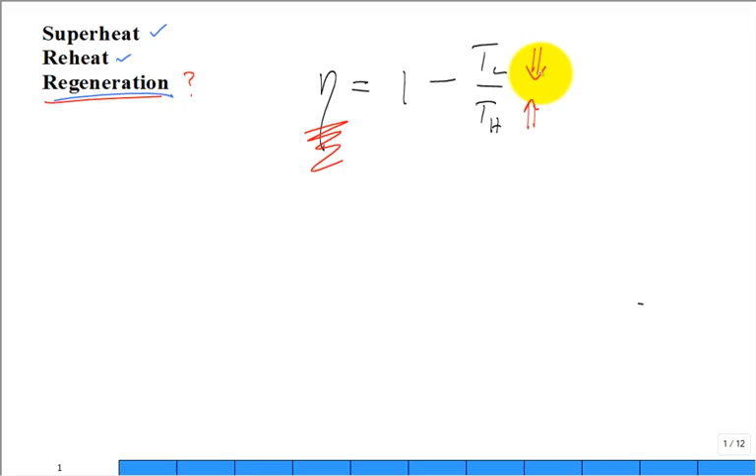So when you look at superheat and reheat, they're trying to focus on getting a lot of heat in at very high temperature. You can look also at trying to reduce TL, but you're kind of stuck there. You have to dump it to lake water, and the lake water is not going to be dramatically different.

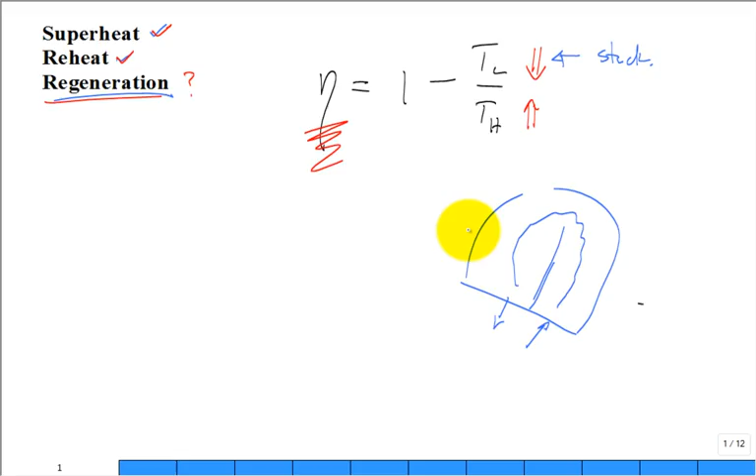Usually they build big lakes. Anybody around here been on a lake where they fish and the lake actually was man-made? I think there's one lake in the state of Texas that's not man-made - the rest are all man-made. A lot of them are made for flood control, but a lot are made for power plants. So what happens is they put in warm water one place, they usually have a little separation zone and make the lake large, and then the water has to go around before they take it back out of the lake. Maybe there's a pump station to keep the lake at constant level. At Bay City, there's a nuclear power plant - they pump it out of the Colorado, or they have runoff from the rivers. But often they make sure the lake water stays pretty constant for the power plants there.

Anyway, you're stuck here, but you can still attack right here. So superheat and reheat are made where you bring the heat transfer into the working fluid at high temperatures. What about this regeneration? It's the same approach right there.

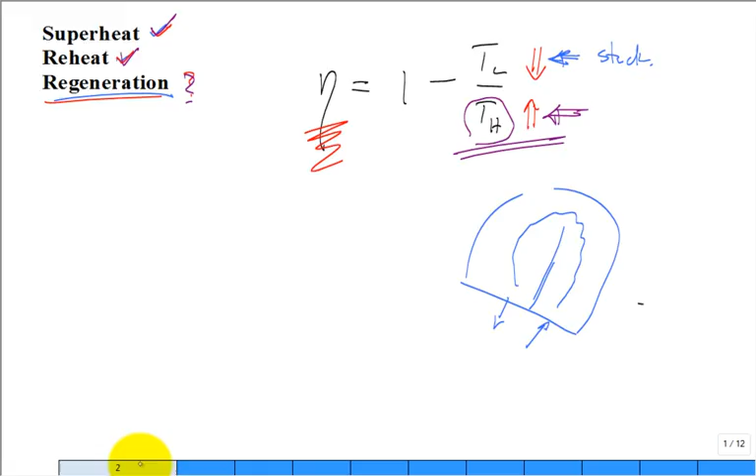What did we know was wasteful in the current system? Let me do this. So from memory, can we sketch a power plant that has reheat? We're going to have the steam generator or boiler, the first turbine stage, the second turbine stage, the condenser, and a pump. And the fluid goes like that.

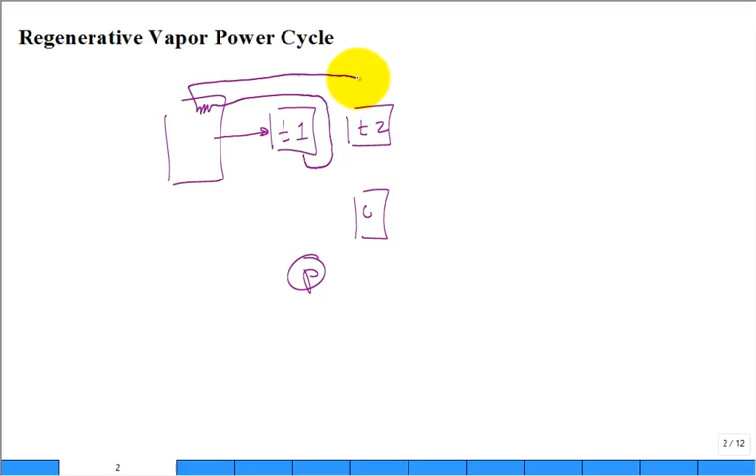So how does it go? It goes out of the boiler to the first turbine, we're going to reroute back to the boiler for reheat, then into the second turbine, out of the second turbine to the condenser, out of the condenser to the pump, and then the pump back.

And why do I try and make a big deal about this - it's a particular Q on the first pass, and this is a particular Q on the reheat pass. Because students will forget the reheat pass, right? Okay, now we have a good idea of the numbering of states. Let's put 1, let's put 2, let's put state 3, state 4, state 5, and state 6.

And we could put this on a temperature entropy diagram. If I put a line of high pressure, then I put a line of intermediate pressure, then I put a line of low pressure.

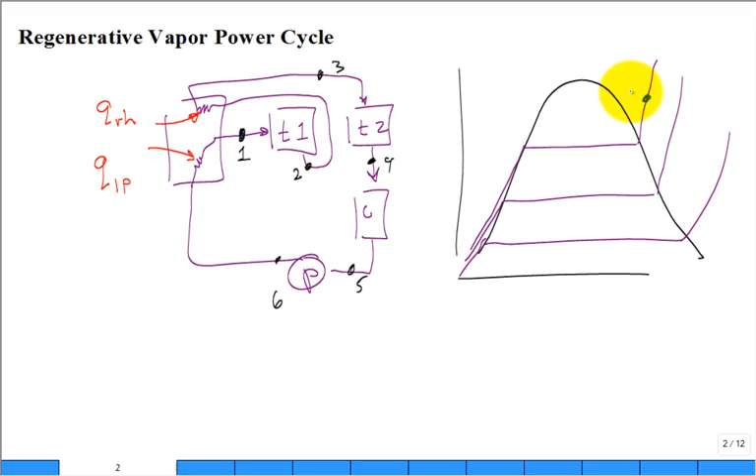Looks like that. Where is state 1 if you have it superheated? Then you go isentropic - this is a TS diagram. Then isentropic expansion down to 2, typically high quality. Reheat, maybe up to state 3, the same temperature - it could be lower temperature at state 3 than 1. Expansion down to 4. Over here, condense at state 5. And where is state 6? Just a little above, and that's state 6 right there. Often it's very difficult to see the difference between 5 and 6 on a TS diagram.

Where is the waste? We just talked about how it's great to bring this heat into the working fluid at high temperature. Isn't all of this heat coming in at relatively high temperature? But where's the waste?

There's more heat being brought in here. But when you're coming out with state 6, we threw some numbers around. Let's say it was a temperature of 60 degrees C at state 5. What's the temperature at state 6? Around 60.5 - it's very close to 60 degrees C at state 6.

And so we threw out some numbers. If you boost it all the way up, it's going to start boiling at around 300 degrees C. I was using 8 megapascal for that boiler pressure, so it's around 295 degrees C. And yet this temperature down here is 60 degrees C. There is a lot of heat addition at low temperature. Is it good to bring in heat into your working fluid at low temperature?

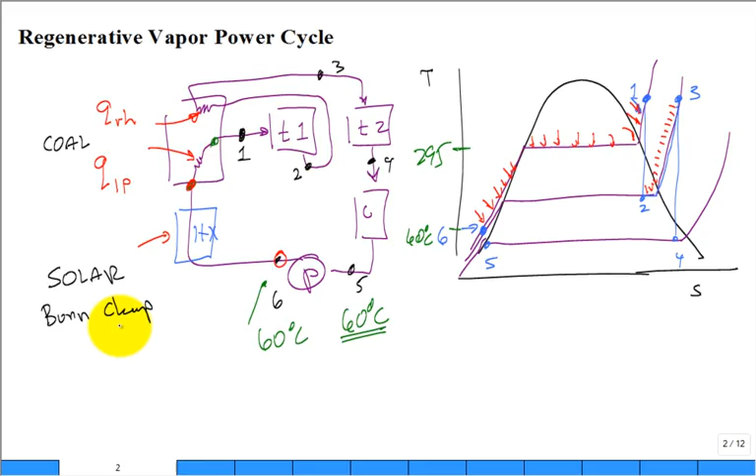So how do you make it work? How do you get it to be a little warmer? What they call this is the feed water. They want the water that's feeding the steam generator or boiler to be warmer, not come in cold at 60 degrees C. So, what do we want to do?

You want to take out of one pocket and put into the other pocket. Basically, when you split that at state 2, it's still pretty hot, and you can do something with it. So what you can do is break it down here and bring it down to what they call an open feed water heater. And that's the strategy in a regenerative vapor power cycle.

All right, so coming out at state 6, you mix with the fluid that's diverted from state 2, and you come out at a new state 7. But if you're going to mix it, it's just an open heat exchanger - you're just mixing two streams.

Can you tell me a little bit about the pressure at 6 compared to the pressure at 2? Would it be greater, less than, or equal? It would be equal. And then, how about the pressure at 7? It's the same - they're all 3 the same pressure. But we know that the pressure at 2 is less than the pressure at 1. So what do I need to put between 7 and the introduction to the boiler?

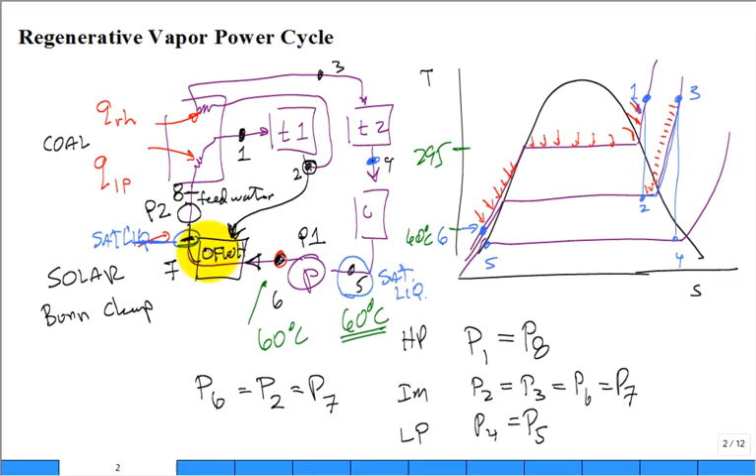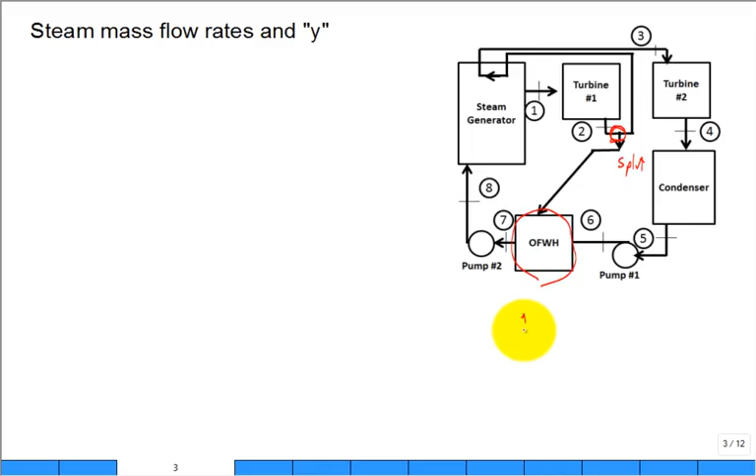Well, we need to talk about our mass flow rates. What's special right here, it's nothing too complicated. You're splitting the flow, aren't you? So it's split right there. What's happening right here is you're joining the flow back together, true? So if we can trace out one stream which continues on the loop, it goes over to this reheat. Then after reheat, it goes through this turbine, through the condenser, through this pump, and then into the open feed water heater along that path.

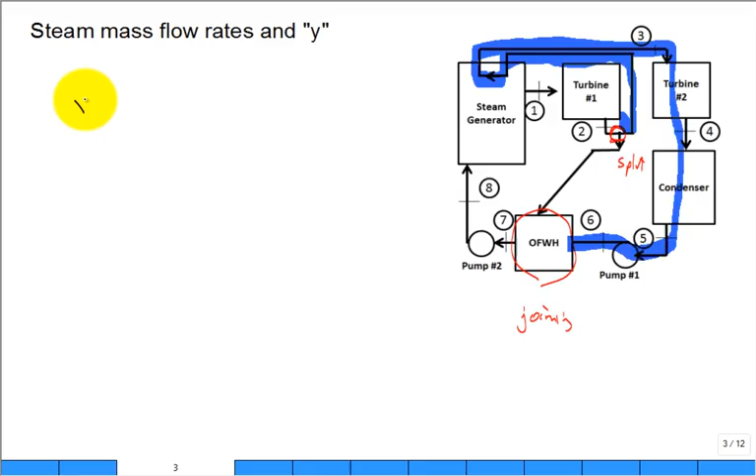So we'll talk about maybe the mass flow rate that goes to the reheat, or the mass flow rate that goes through the second turbine, or the mass flow rate that goes through the condenser, or the mass flow rate that goes through pump number 1. But if I have 11 kilograms per second flowing through reheat, then I have the same magnitude kilograms per second going through the second turbine, condenser, and first pump.

The other is what is split off this and gets diverted down here. Now this is not rocket science, I'm just going slowly over a mass balance. We have to get the mass balance correct. And then the other is after it's joined together, right here, it goes through the second pump and then through the first pass of the steam generator and then through the first turbine.

Does that make sense? So we really have 3 distinct mass flow rates. So the other mass flow rate is, let me just write it down, the mass flow rate through the second pump, mass flow rate through the first pass of the steam generator, and the mass flow rate through the first turbine. And then the last one, there's really not a good subscript. I'm making a lot of these subscripts up. I don't think the book uses this many subscripts, but I'm trying to be clear about it, is the mass flow rate of steam that's diverted to feed the open feed water heater. And so this is the amount that's to feed the open feed water heater.

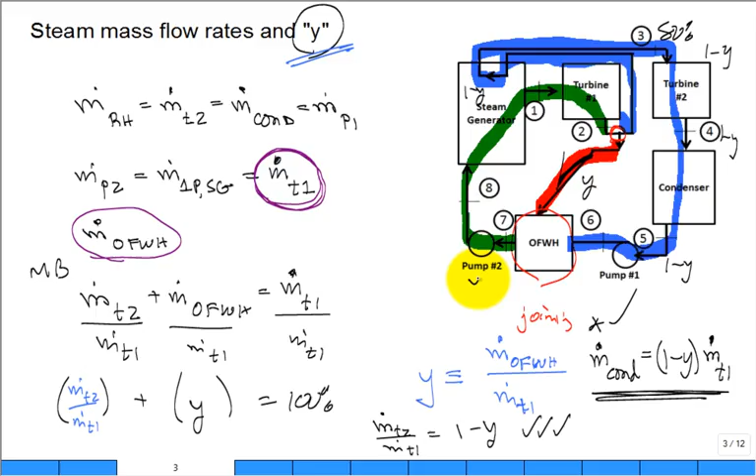Let's press forward then. But all of this page is all on mass balance and introducing that term Y. And a lot of times you'll see me say, for what the split is, that's Y. And then this over here is 1 minus Y, 1 minus Y, 1 minus Y, 1 minus Y—that's the fraction that goes through the pump, the condenser, the second turbine, the reheat. And then it's joined back up to 100% that goes through the second pump, 100% that goes through the first pass of the steam generator, and 100% that goes through the first turbine stage.

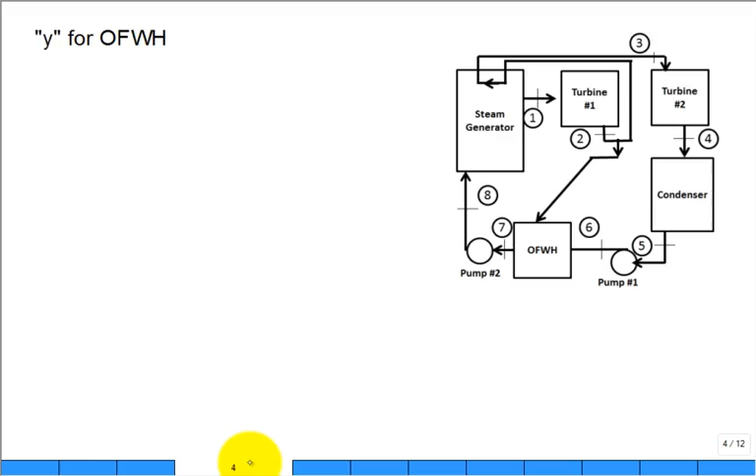How can I determine how large Y needs to be for this open feed water heater? Somebody says, well, Y is 19.3%. Okay, well, where did that number come from?

So I'm going to pause for a second, and I would like you to work on this problem to develop the equation for Y and be able to explain it to me as I walk around—like, this is what I'm doing in order to calculate what Y needs to be for this problem. And Y will depend on the pressure of the steam generator or boiler, the condenser pressure, the intermediate pressure, the amount of superheat coming out of the steam generator, and the temperature coming after the reheat.

Well, let's see, a couple jokes. You want a joke? How many people took Texas history? It's a college level requirement to graduate, blah blah blah. Yeah, I did too. One of the things I learned was that there was a governor named something Hogg in the history books of Texas. Do you remember Governor Hogg? I forget what years he was, 1910 or 20 or something. And he had two daughters. And he named one of them—does anybody know this?—Ima, so that she would say, who are you? I'm a Hogg. And then the other one is You're a Hogg. True. Anyway, I named my two daughters...

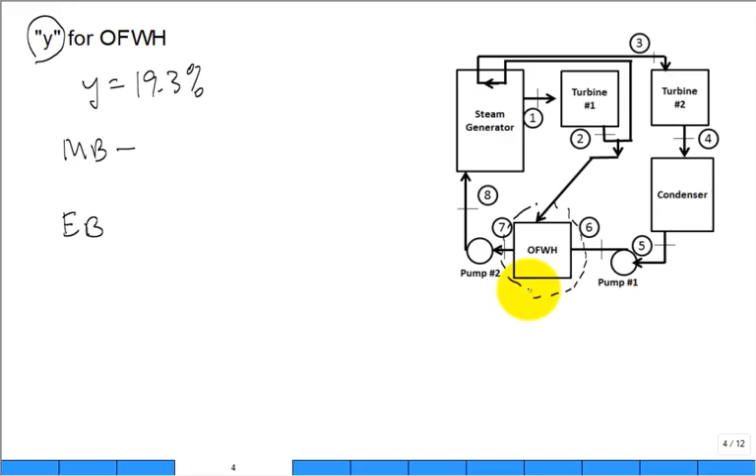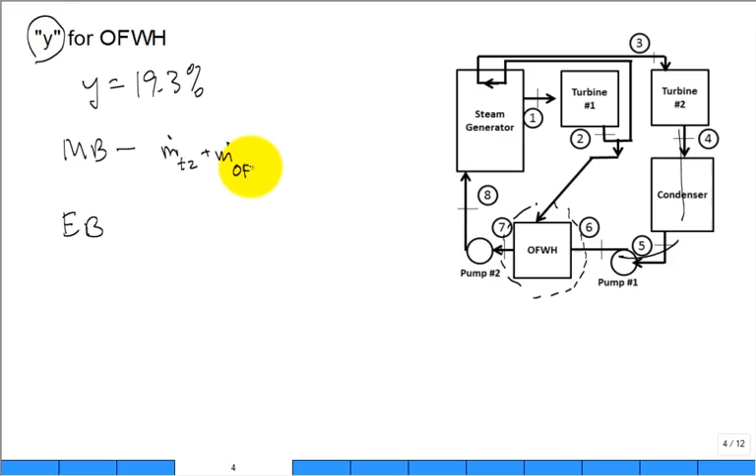So what we do is we introduce a control volume. I think the action's right here on that open feed water heater. And if I have a mass balance for that open feed water heater, I need some syntax for the subscripts. I would say m dot through the second turbine, because that's what goes through the condenser through the first pump, plus the mass flow rate that's diverted to feed the open feed water heater, is equal to the mass flow rate that goes through the first turbine. Well, it also goes through the second pump and through the first pass of the steam generator, right?

Now let's leave that alone for a second. Let's now combine it with an energy balance for the same control volume around the open feed water heater. What is the energy balance? I'm going to pause, walk around.

So let me help here a little bit. What do we have for an energy balance? I know that you can start with a control volume and the rate of change, neglect kinetic and potential energy, and there's no shaft work and no rate of heat transfer outside the control volume to the environment.

It boils down to the mass flow rate coming in, that stream coming from pump 1, which brings with it its enthalpy at state 6. Did I do that right? M dot T2 is the same as M dot condenser, M dot pump 1, right? Plus the mass flow rate coming to feed the open feed water heater, bringing with it its enthalpy at state 2. It's a little confusing.

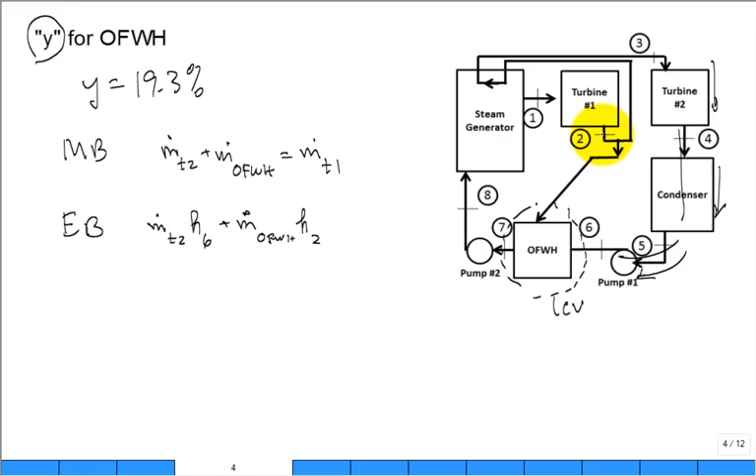Somebody said, what's the enthalpy of the steam going over to the reheat that enters right there? What's that enthalpy? It's also 2. It's also 2. But that has to equal the mass flow rate that comes out, goes through pump 2, goes through the first pass of the steam generator, and into the first turbine stage, with its enthalpy H7.

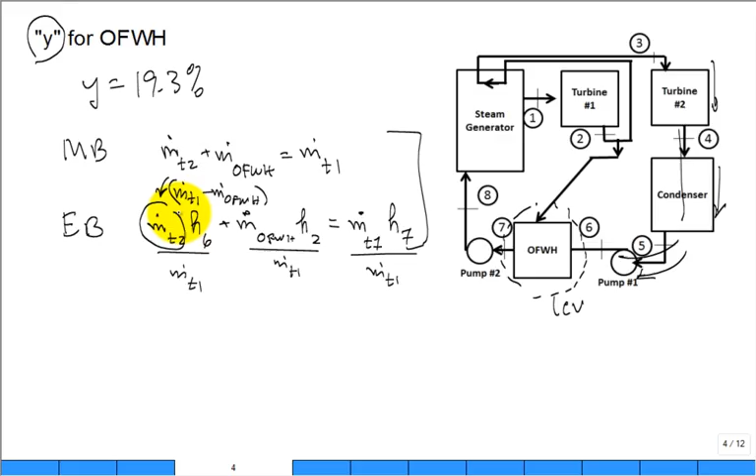Now we have 2 equations, and you can do some manipulation. How do you want to do the simplification? You can divide the whole equation by M dot T1, M dot T1, M dot T1, and substitute this right here from that equation. You could substitute that's M dot T1 minus M dot open feed water heater. I know I'm doing a couple steps at one time, but I would get an equation. You have more space than paper.

You would go a little slower, and you would get 1 minus y times H6 plus y times H2 equal to 1 times H7. And then we do a little more algebra: Y is equal to H7 minus H6 divided by H2 minus H6.

I checked a few people. Did you have every subscript correct on this definition of Y? Yes, yes, yes, 3. How many others? 4. You had it perfect? Because you can easily have a subscript off, right? There it is. Where did that equation come from?

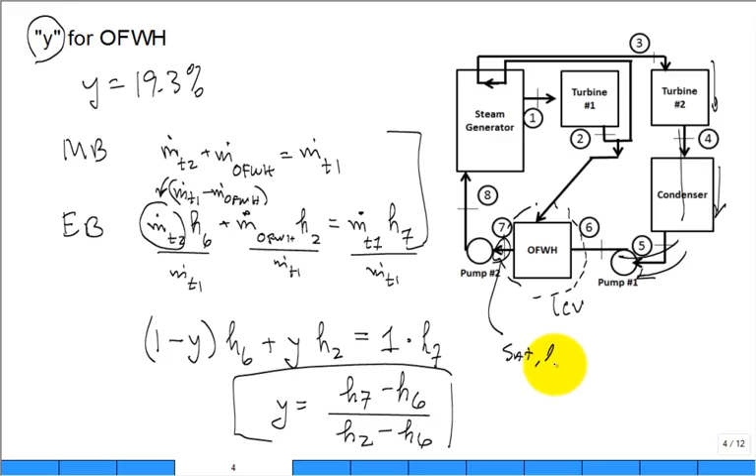Mass balance and energy balance around the open feed water heater. And notice, remember, state 7 is going to be dictated—it needs to come out as saturated liquid. All right.

Words can be very confusing, and this is possibly one of them. So let's just read it. The question may read something like, determine the heat transfer from the working fluid, right there. What do they mean by the working fluid? It's the fluid that's going through the different components—this component, that component—passing through the condenser. So now it's only the working fluid going through the condenser.

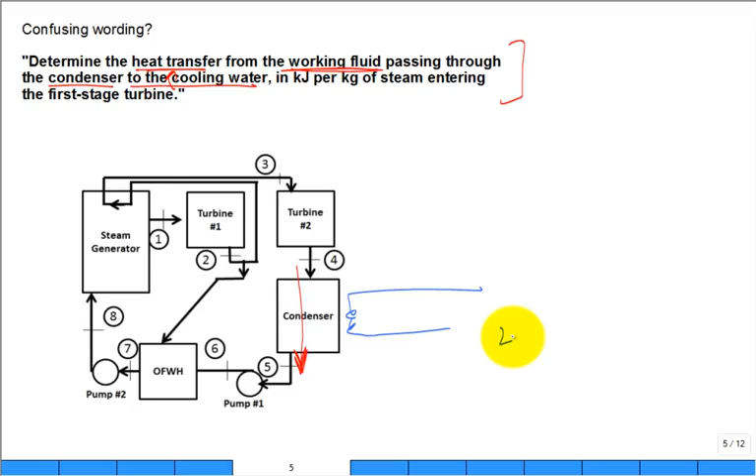To the cooling water. Well, what's to the cooling water? The heat transfer—this is actually modifying the heat transfer. So it says, determine the heat transfer from the working fluid going through the condenser that is being transferred to the cooling water, which is some sort of lake water. You can think of lake water, it can be river water, a bunch of different things. But it has a temperature in and a temperature exit. And isn't there a transfer of heat between the two?

And this is a great Q dot right there. So thinking Q dot is out of the working fluid going through the condenser and into the cooling water like that. But they want it in these units—they want it per kilogram of steam entering the first turbine stage. This is the confusing part. The rest of it was pretty good so far, but it's per kilogram of steam entering the first turbine stage.

If you do a control volume around the condenser, you do have a Q dot out of it because the control volume doesn't cut way over here—it's not cutting the inlet and outlet of the cooling water, it's cutting between the heat transfer of the two fluid streams. You'll find that this Q dot is equal to the mass flow rate through the condenser times the enthalpy 4 minus enthalpy 5. Do you agree?

So if you take this equation and modify it, you have q dot divided by m dot through the condenser—that's like lowercase q in the condenser, and that's h4 minus h5. But this will be kilojoules of heat transferred from the working fluid per kilogram of fluid that's going through the condenser. But they want it not per kilogram of fluid going through the condenser—they want it per kilogram of fluid going through the first turbine.

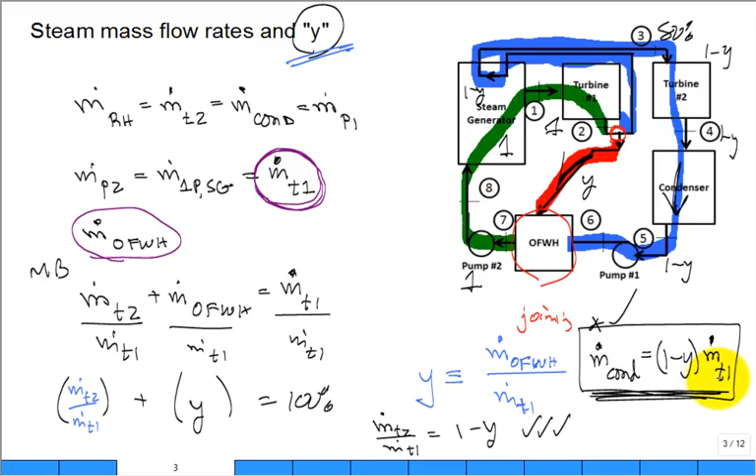So either we think back, what was the relationship between the mass flow rate of fluid flowing through the condenser and the mass flow rate of the fluid going through the first turbine? So what we do is bring it over here and write Q as 1 minus Y times the mass flow rate through the first turbine times H4 minus H5. Do you see that substitution?

Did that make sense? Now they want you to calculate Q dot divided by M dot T1. That's Q dot in the condenser equal to lowercase q in the condenser, which is 1 minus Y times H4 minus H5. That's what they really want, because now it's per kilogram of the working fluid that enters or goes through the first turbine stage.

Why does it appear so confusing? Because then everything can get on the same per-kilogram basis when you do an energy balance, knowing the works and heat transfer for each component. When I put in a little work, all I do is boost the pressure of the fluid going through the condenser and through that first pump. The work from the second turbine is per kilogram of fluid going through the second turbine, but I may want to combine it to calculate the net work of the cycle, putting it on the basis of what goes through the first turbine.

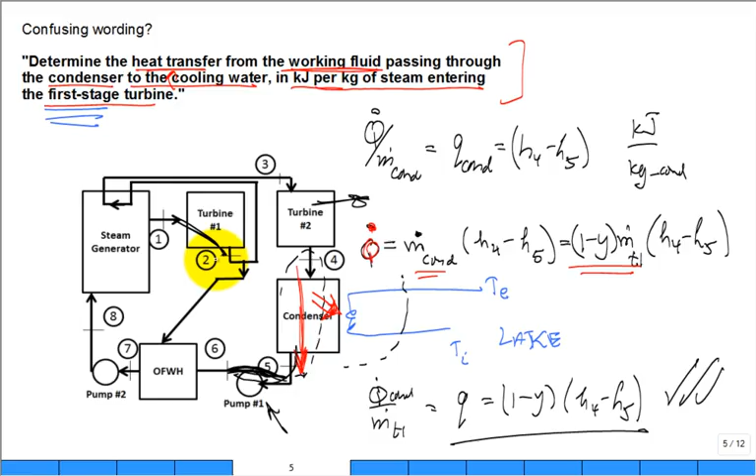All right, so here's a problem. I see I have 4 minutes left. I ran out of time. How come I was a little faster at 9 a.m. than at 1 o'clock? I don't know. At 9 a.m. versus 1 o'clock. Pardon?

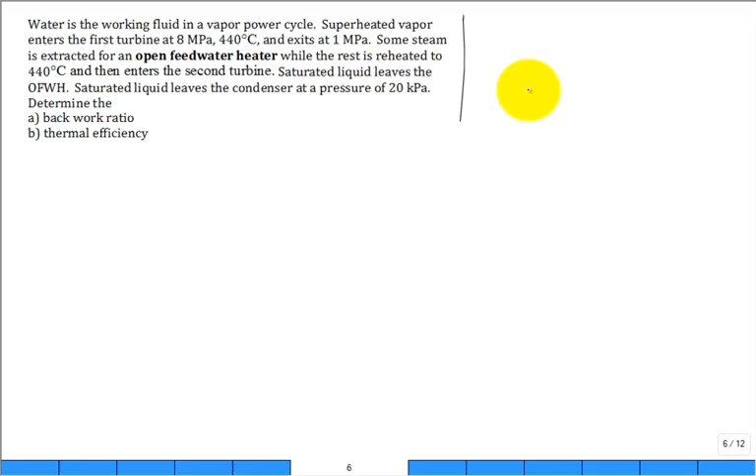Yeah, all right, she's helping me here, reminding me. How do I solve a complex problem like this? Step 1: get a schematic, and the schematic needs to have components and states clearly shown. I need all the components. How many pumps do I have? How many turbines? Do I have reheat? Where's the condenser? Where's the feed water heater? Then I need the states on that diagram. So the diagram with the components and the states—that's not a small matter from a word problem.

The next step: give a diagram, a temperature entropy diagram. Where are all of these states on a TS diagram? That will help you immensely. I don't have enough time, but I have a TS diagram for you today. I was going to do that.

And then after you have a TS diagram, you have a shot at getting a table full of properties. Table full of props, and the most important list or column is the H's—I need all the enthalpies. I may also use quality and entropies and this and that.

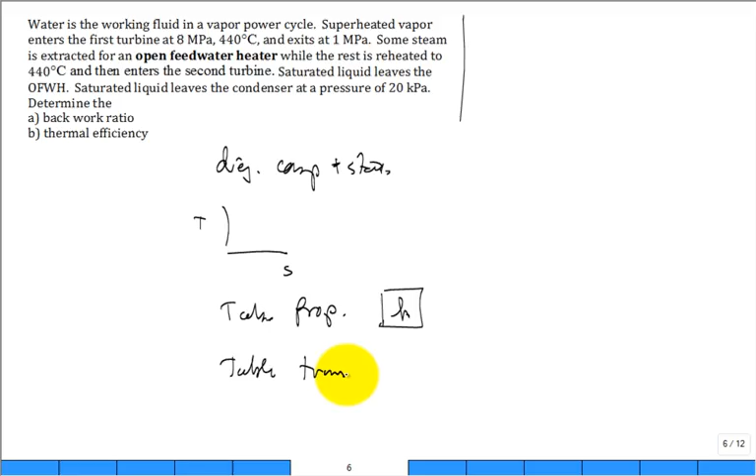Then I get a table of transfers—what do I mean by transfers? The Q's and the W's. In this case I like to work with lowercase q and lowercase w, but things change when I have an open feed water heater, a regenerative cycle, because it splits. So I'll actually have what I call Q asterisk and W asterisk, where these are per kilogram going through the component, but the others are per kilogram that went through the first turbine.

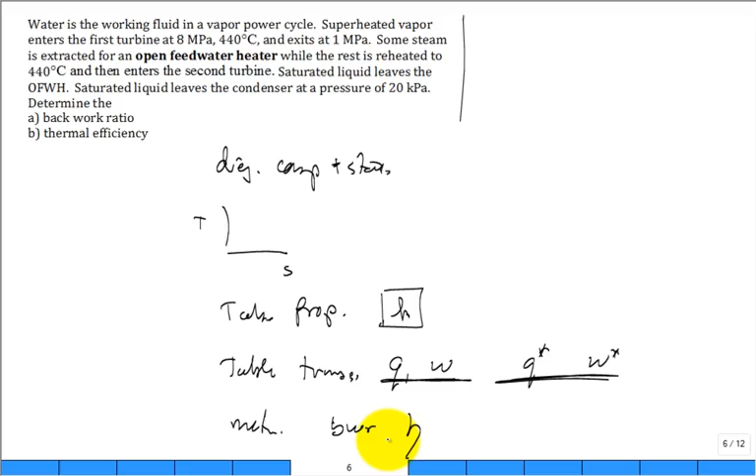And then I have my metrics to calculate: the backwork ratio and the thermal efficiency. You really have to do this all by yourself. I do have 2 minutes.

Can you please show me where each of these states would be on a TS diagram? There's a TS diagram, and we didn't change anything. How many states did we have? 7. We have 8, 9, and 10 that I use for diagnostic purposes, looking inside what's happening.

But believe me, you asked the question, is this really going to be effective? Well, if you look back, 35% of the heat was used just to heat the water up to the boiling point. Now, because it's coming in a lot hotter, only 22% of the heat is used to bring it up to the boiling point, because it's not coming in at 60 anymore—it actually comes in over 180. And that's why, with no external additional use of any fuel or anything, it's just piping inside.

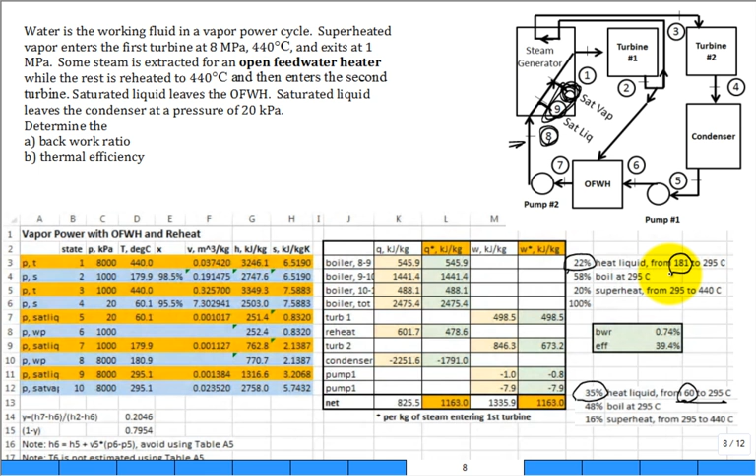So I guess I'll stop and not ask you to put them all, but please work to put them all on the diagram like this. People are going to have a hard time with that very last state, state 8. Thank you very much for your attention.